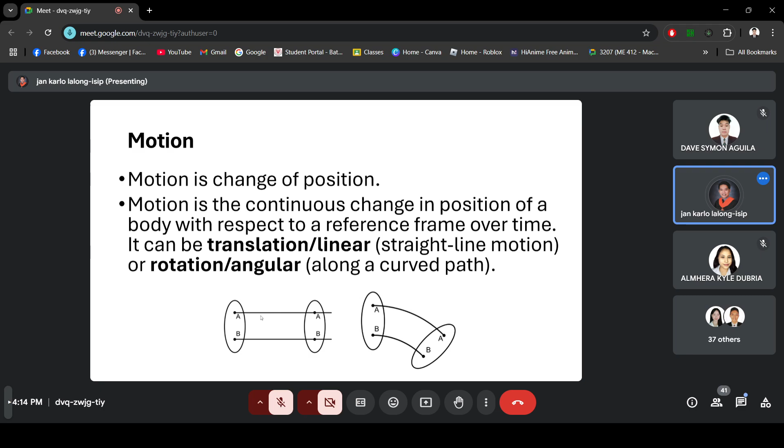So motion, ilang beses na natin na-define, motion is a change of position. So motion is a continuous change in position of a body with respect to the reference frame over time. So sabi nga natin, it can be translation or rotation or angular. So path, a point moving in space describes a line called its path.

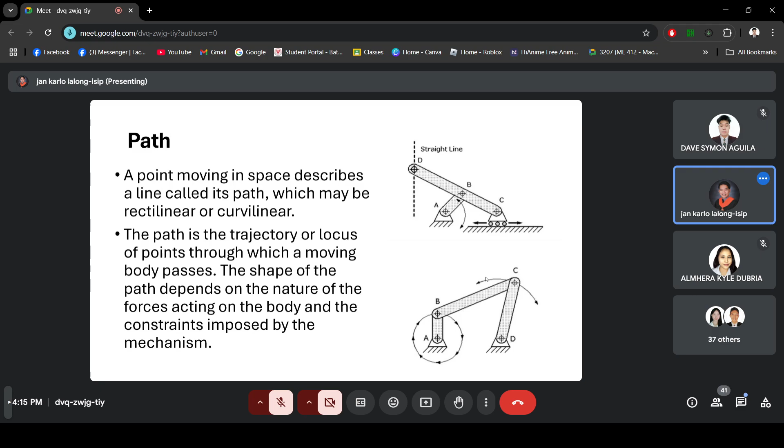While yung ating point C naman, ang kanyang path ay left and right, ganito. Another definition, we have the direction. So direction naman, it refers to the orientation of movement along the path. Tulad nito, ang direction niya is up and down. Ito, left and right. Ito naman, ang kanyang direction ay clockwise. Ito naman, it is back and forth. So pabalik-balik siya, going to the left and going to the right.

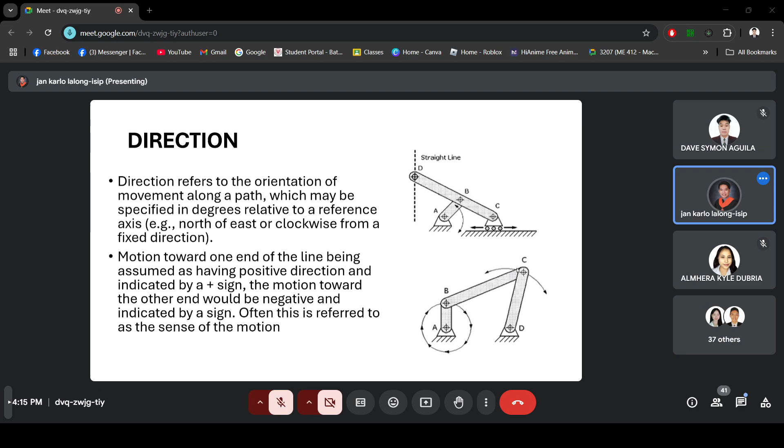So, yun lang naman yung mga basic terminology na ginagamit natin when it comes to the study of motion. Okay, now, so we have minimum and maximum transmission angle. So, we have already discussed yung pag-identify natin, paano ba natin minemeasure yung length at saka yung mga angles ng isang mechanism. So, for this example, we have the 4-bar linkage.

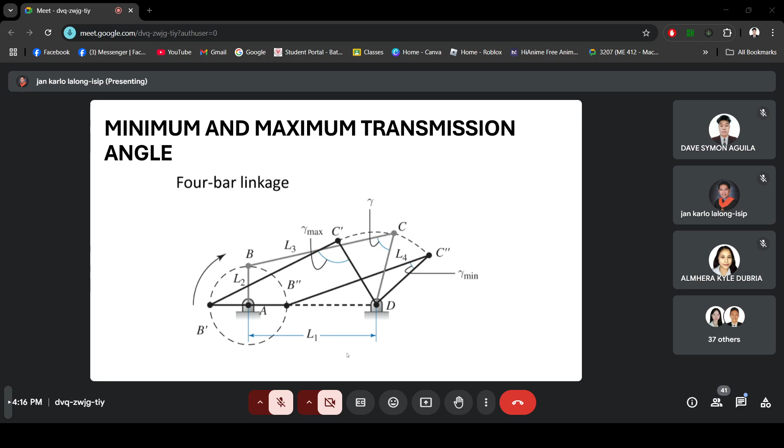Okay, so wait lang, lilipat lang ako. Okay, wait lang natin mag-respond.

Bale, last meeting, tama ba? We have discussed yung ating vector analysis. So, we studied kung paano ba natin aalamin the angles at saka yung ating mga sizes ng length ng ating mga links. Okay, so for our 4-bar linkage example, how are we going to identify kung kailan nag-occur yung kanyang minimum or yung kanyang maximum transmission angle? Okay, so if we take an example nga ng ating 4-bar linkage.

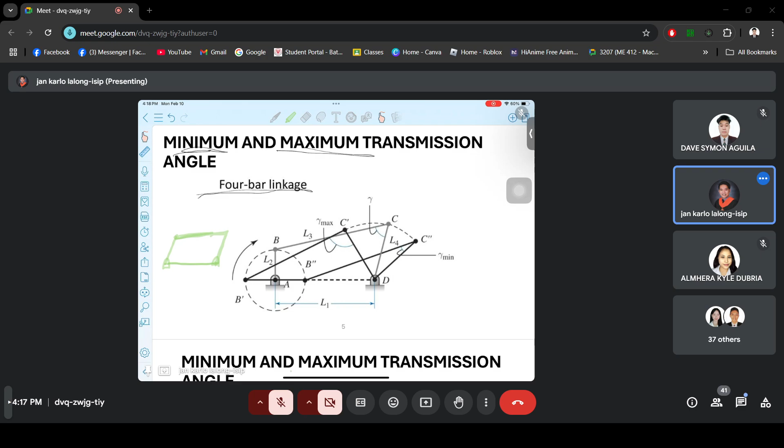Okay, so we have the fixed link. Tapos, yung ating input link, our connecting link, at saka yung ating output link. Tapos, kailan ba natin masasabi na angle is at maximum? So, angle is at maximum kapag yung ating input link ay naging collinear sa ating fixed link. So, parang ganito. If you have this fixed link, this will be our input link. Tapos, we have our connecting link at saka yung ating output link.

Okay, so nasan ba yung ating transmission angle? So, anybody? Do you remember sa ating last discussion? Saan located ang ating transmission angle? Class? Hindi na ba tanda? Sa upper right po. Upper right? Okay. Again, I will discuss it.

Diba we have our input link, our fixed link, ito, our connecting link, at saka yung ating output link. Our input angle ay yung between sa ating fixed link at saka sa ating input link. So, ito yung ating input angle. While yung ating transmission angle is located between our connecting link at saka ang ating output link.

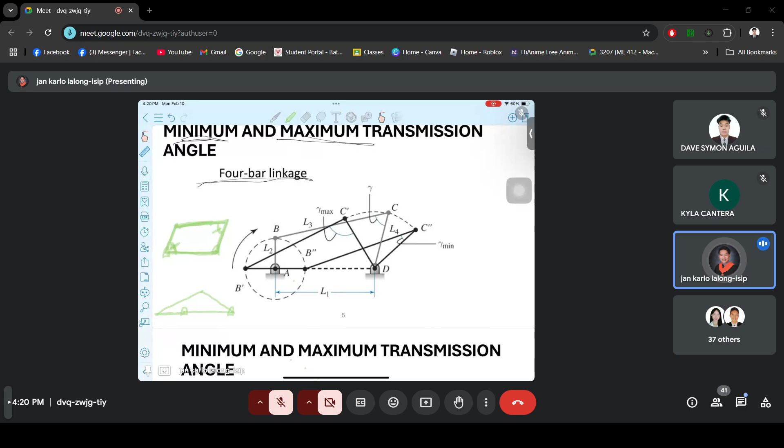So, another question, naalala ba kung nasaan ang ating output angle? Sa lower right po. Ano yun? So, ang ating output angle ay located dito sa ating labas ng link. So, this is our output angle. Ito yung ating transmission angle. At ito naman yung ating input angle. So, make sure na alam nyo yung ating mga terms na yan.

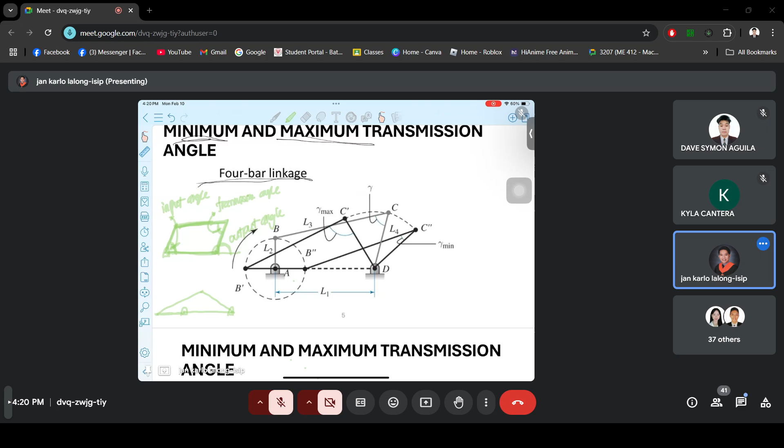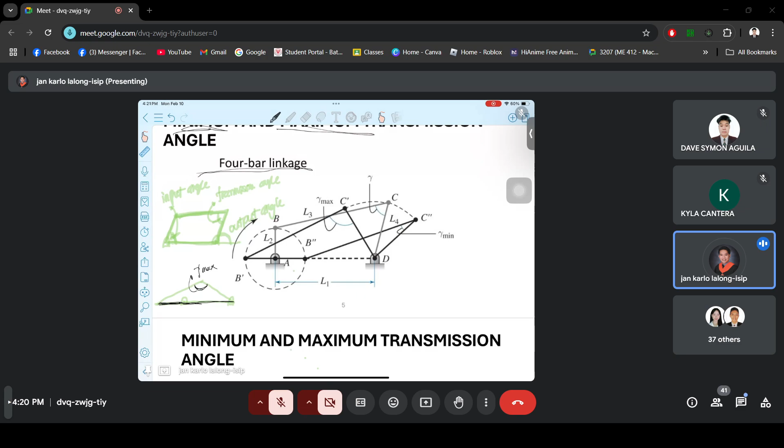Okay, so kapag daw yung ating input link ay collinear na sa ating fixed link, our transmission angle is at maximum. So at this point, our transmission angle is at maximum. Okay, so now, paano naman natin ma-identify if the angle is at minimum value? We can say na nasa minimum value siya if yung ating input link naman ay naging collinear din sa ating fixed link, pero hindi lang siya naging collinear, pumatong siya sa ating fixed link.

Okay, so let's have the figure. If you have this fixed link, ngayon, our input link ay pumatong dito sa ating fixed link. Tapos, we have our connecting rod or connecting link saka yung ating output link. So, at that point ng ating 4-bar linkage, this angle will be our minimum transmission angle. Okay, so are we now clear? Kapag 4-bar linkage, alam na kung kailan nagiging maximum at kung kailan nagiging minimum yung ating transmission angle.

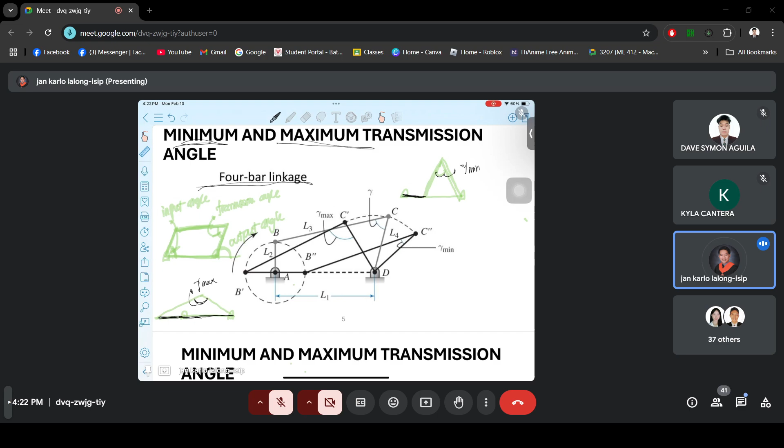Okay, so let's proceed. Paano naman kapag we have a slider crank mechanism? Kung makikita nyo, nandito yung ating ground, pero meron din tayong fixed ground dito. So paano ba natin i-measure yung ating transmission angle? So with that, we have our slider crank mechanism. We are going to get yung perpendicular line dito sa ating slider. Tapos, this angle will be our transmission angle.

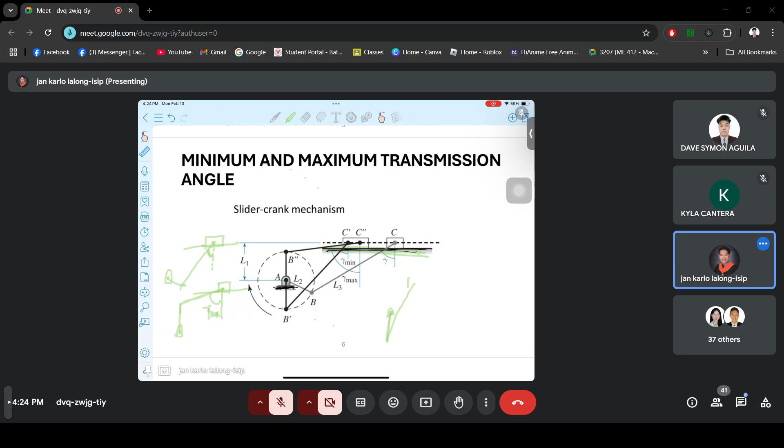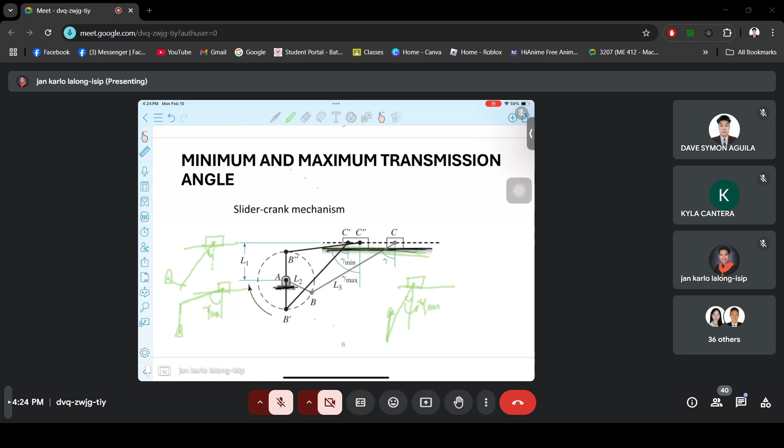Okay, sige. Proceed tayo sa sunod. Let's focus more on this sample problem. Okay, so last time we have solved yung ating 4-bar linkage, no? We get yung ating mga angle, yung ating transmission angle. So for now, for this example problem, I just want to assess din. Wait lang.

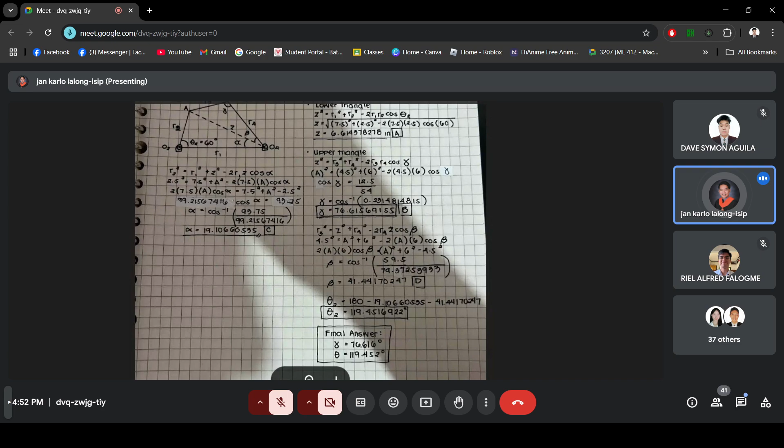Okay, so thank you. Pareho ba kayo na nakuha dito? How about the others? You have the transmission angle of 76.62. So sa final answer, let's just round off sa dalawang decimal points, ha? Tapos we have the output angle na 119.45. Okay, so very good for that.

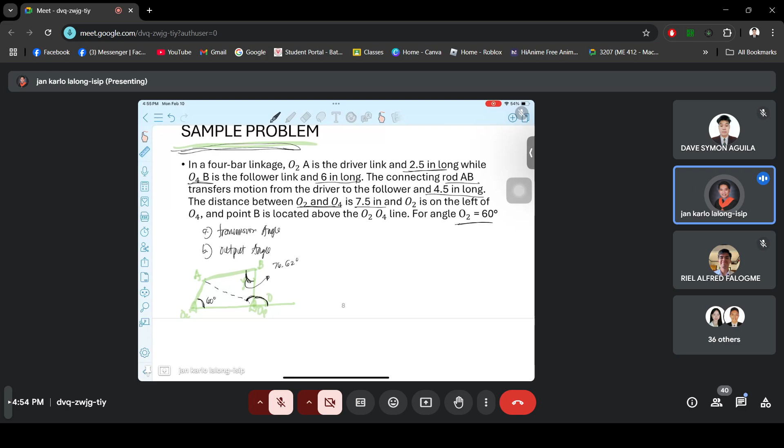So if you sine law, so we have sine O sub 4 over yung katapat ng side. So ang side na ito ay, ang measurement niya ay 4.5, tama? So this is 2.5, this is 7.5. Tapos ito ay 6 inch. Okay, so 4.5 is equals to sine B, which is 76.62 degrees over yung value ng ating AO sub 4.

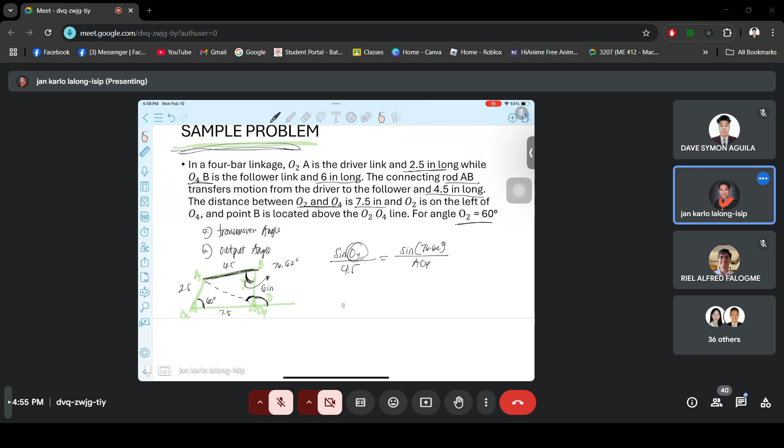Makukuha na natin itong O sub 4 dito. Okay, so kanina ang pinresent is gumamit ng cosine law. So sabi ko nga, any naman ang gagamitin nyo. Okay, so very good. Nakuha naman. We have 76.62 tapos yung ating output angle na 119.45. 119.45 degrees. Okay, so sabi ko nga sa inyo, this illustration

ay para lang sa ating visualization. Para lang ma-visualize natin ano ba yung itsura ng ating 4-bar linkage. Pero if we use it graphically, mas magiging accurate yung ating drawing.

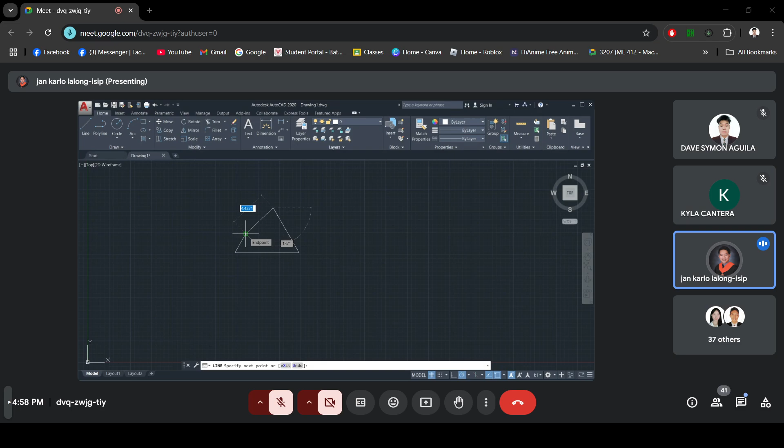Tapos this is 6 inch long. Kung makikita natin, if we are going to connect itong ating dalawang point, so this is 4.4271. So ang ating measurement nito, exactly, kapag ginamit natin ay yung ating analytical approach, so that will be 4.5. Tama. So since yung ating ginamit na angle is 120 kasi hindi naman natin ma-exact yung ating measurement ng angle dito sa ating AutoCAD. So nagkaroon lang siya ng konting differences.

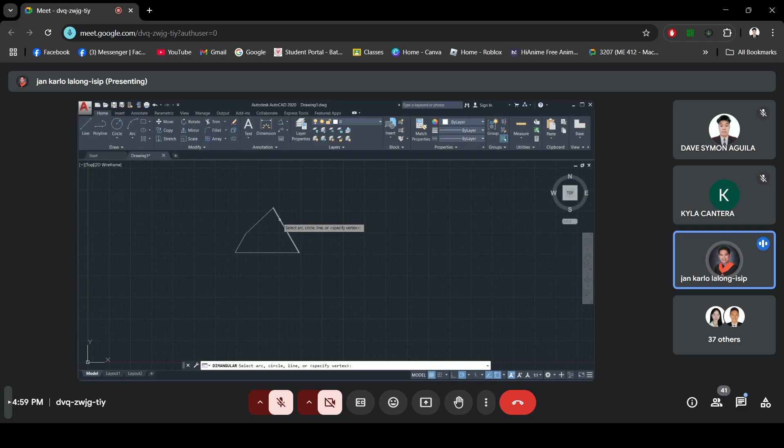Okay, so if we measure yung ating angle dito, so this is 77 degrees. Okay, so kanina nung kinuha natin using our analytical approach, so yung ating transmission angle is 76.62. If we use itong graph, so na-measure natin na meron siyang 77 degrees, which is really close sa ating exact value. So in graphical approach, this is acceptable.

Okay, so are we clear sa pag-graph or pag-drawing ng ating 4-bar linkage using the situation sa ating problem?

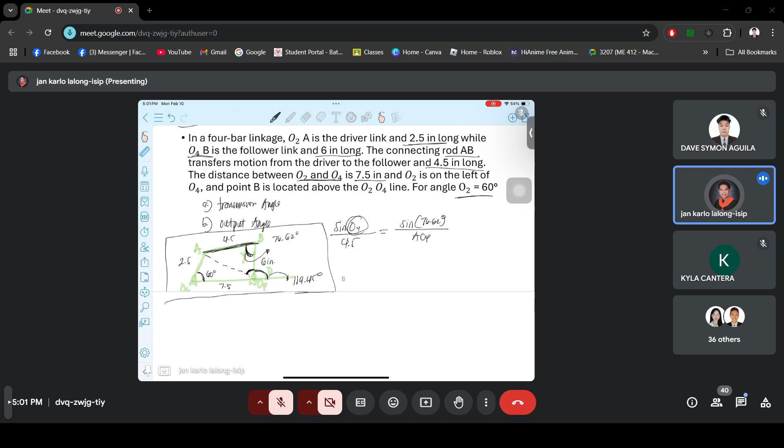Okay, so let's proceed. Paano naman if we are going to get, paano natin ma-identify yung ating maximum, yung ating 4-bar linkage at maximum transmission angle and at minimum transmission angle. So kanina, we have identified kung paano ba natin masasabi na ang ating given ay at maximum or minimum transmission angle. Okay, so we can say na we have, wait lang, excuse me lang.

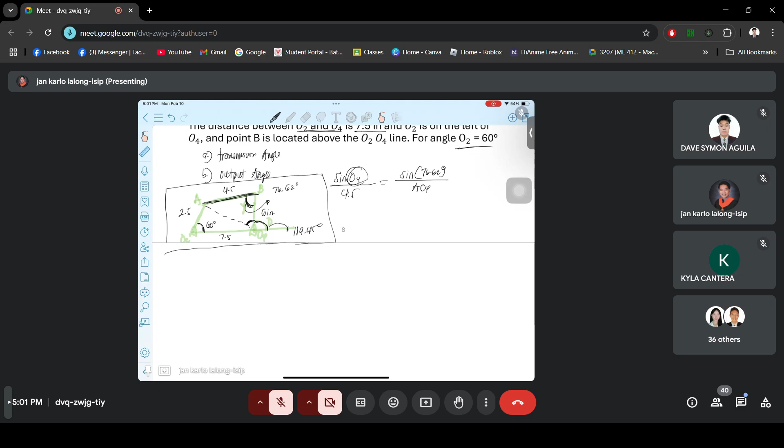We have the maximum transmission angle when our input link is linear to our fixed link. If we have this fixed link, which is 7.5 inches, it's maximum when our input link, which is 2.5 inches, is positioned here. Then we have our connecting link, which is 4.5 inches, and our output link which is 6 inches. Now we are going to get this transmission angle.

So that will be our maximum transmission angle. Do you have any idea how we are going to get our transmission angle? What are we going to use?

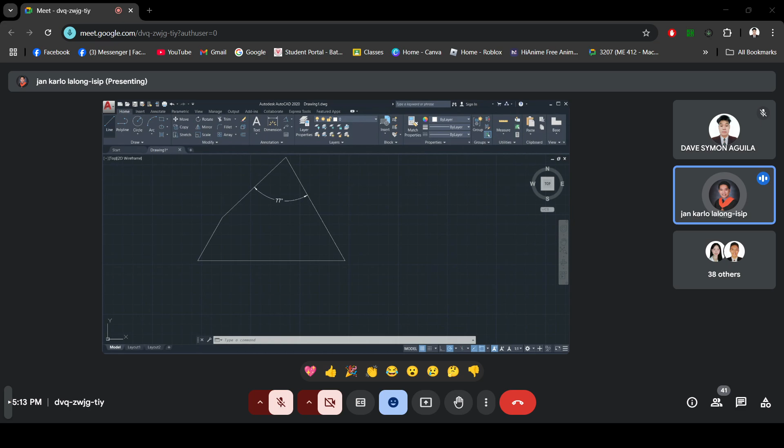Okay, so let's try again sa ating AutoCAD on how are we going to present it on a graphical way. Okay. So dito, we have our fixed link at 7.5. Wait lang. So hindi pala siya kasha. So we have 7.5 na fixed link. So this link will be 7.5. Tapos yung ating input link na 2.5 ay inline sa ating fixed link. So we have this link. Tapos we have our output link na may output angle na 15.29.

So let's just say na okay. So hindi pala natin na minus. Let's go back muna dito sa ating solution. Medyo nagmadali. Okay, so this is still our angle O sub 4. Ito yung angle na yon. Ito yung ating 15.29. So to get yung ating angle na to, we have 180 minus 15.29 degrees. Paki-minus, what will be the answer? 164.70 po. So we have 164.70 degrees. So this is our output angle.

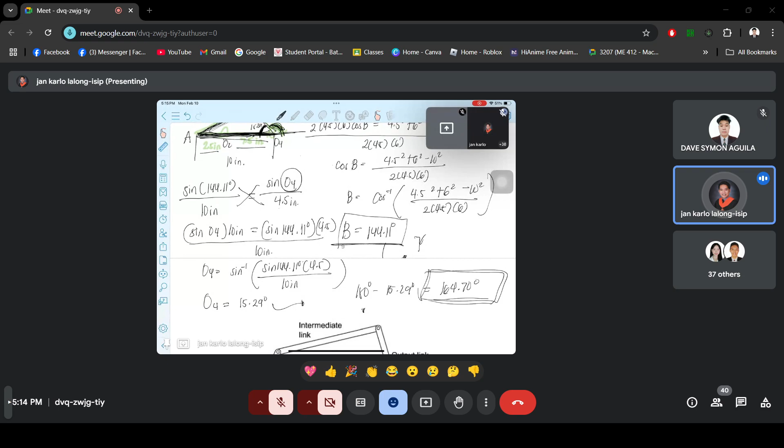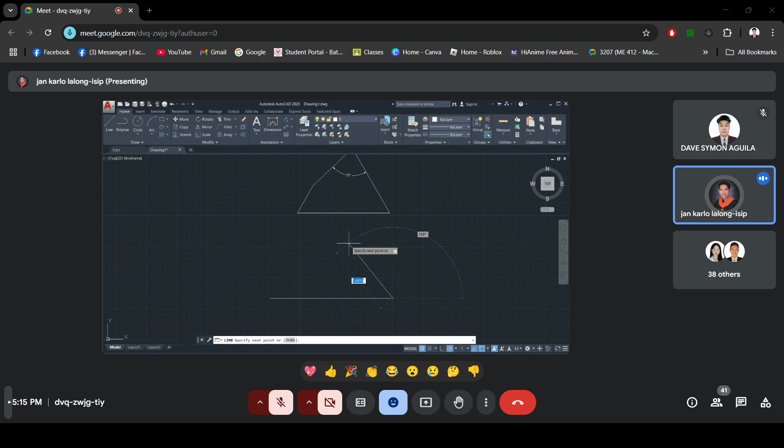So going back sa ating graphical approach. So let's go back here. Ulitin na natin. Diba, meron tayong fixed link na 7.5 dito. Tapos, yung input link natin ay nakaline sa ating fixed link, which is 2.5 ang kanyang length. Tapos, we have our output link dito. Tapos, meron siyang angle na 164.70. So, let's just say 165 degrees. Yan. Tapos, siya ay 6 inch long.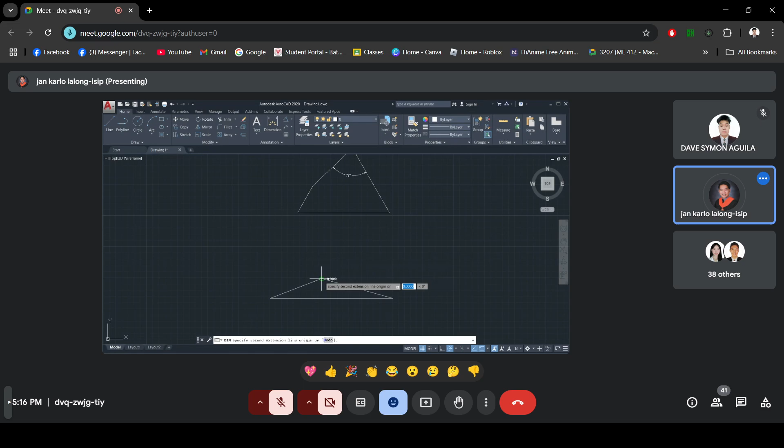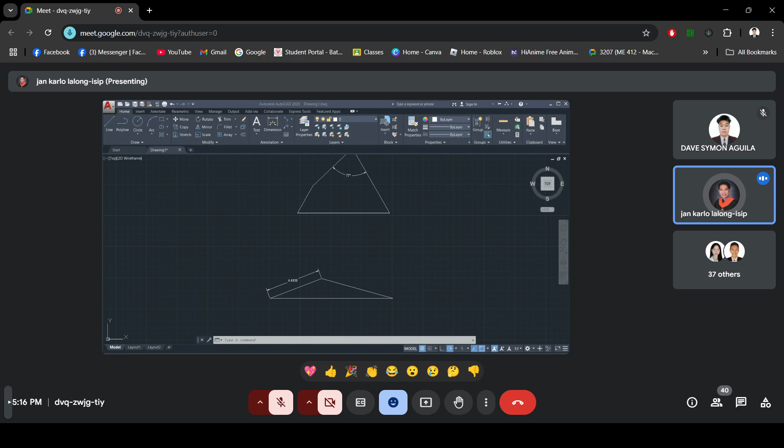At connecting sa ating input link, yung ating connecting link. So, kung makikita natin, okay. Mali. Hindi pala dapat linear. Align. So we have 4.49. So kung makikita natin, our value ng ating connecting link ay 4.5. So almost equal na sila.

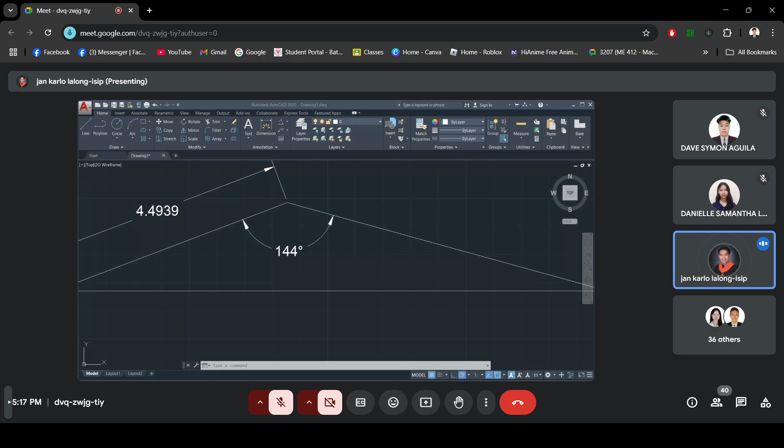Tapos, if we get yung ating angle dito, we have 144 degrees. So, yung ating na-compute, we have 144.11. So, makikita naman natin, yung nakuha natin in analytical computations at sa ating graph sa AutoCAD, almost the same. Mas exact lang yung ating nasa analytical approach. Okay, so alam na kapag we have our maximum transmission angle. Okay, so let's proceed sa next.

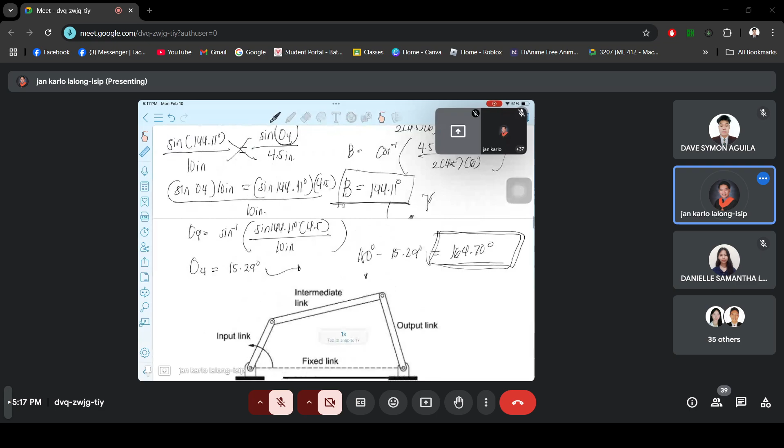We have to identify naman yung ating minimum transmission angle. If we have our minimum transmission angle nga, sabi natin, naging collinear din yung ating fixed link at input link, pero yung ating input link ay pumatong sa ating fixed link. So if we have our 4-bar linkage dito, we have our fixed link. Tapos, ito yung ating magiging input link na nakapatong. Tapos, we have our connecting link at saka yung ating output link. So, this will be our minimum transmission angle.

So, ngayon, this is 7.5 inches, itong kabuuang ito. Tapos, this is 2.5 inches. Ito ay 4.5 inches at ito ay 6 inches. Okay, so anyone, do you have idea paano natin kukunin itong ating minimum transmission angle? Any idea paano natin yun makukuha? Nandito ba si Catapang?

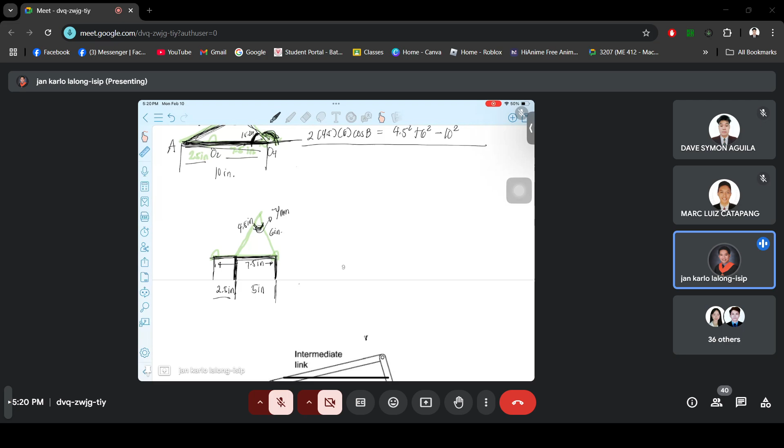Okay, so ngayon makukuha na natin yung ating transmission angle. We have the cosine law. So we are using this angle. So para ma-equate natin using cosine law, we will get yung katapat niya na side. So ang katapat ng angle na to ay 5 inches. So we have 5 squared is equals to yung ating dalawang side pa: 4.5 squared plus 6 squared minus 2 times 4.5 times 6 cosine, ito ay ating B.

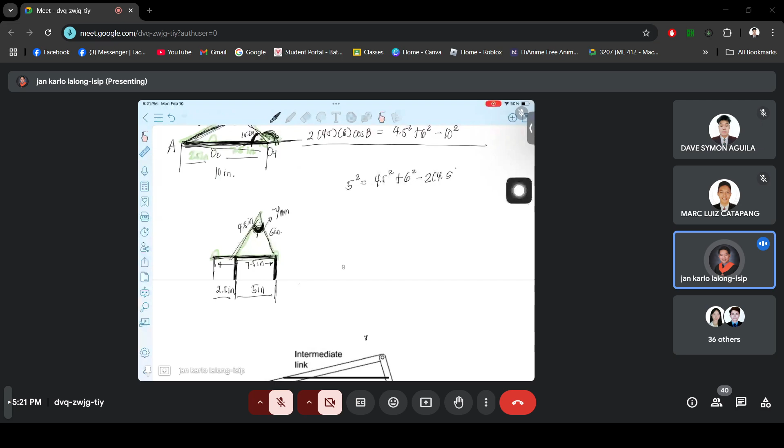We have O sub 2, O sub 4, tapos nandito yung ating point A. Cosine B. Okay, so we are going to use yung ating equation din kanina. Para makuha natin yung ating angle B, we have arc cosine of 4.5 squared plus 6 squared minus 5 squared over 2 times 4.5 times 6. So again, this is same lang naman dito. You can use naman shift solve. It's up to you. Basta makita ko itong mga values na yan.

So what will be the value of our transmission angle? Pakicalculate, ano ang lalabas sa ating transmission angle? 54.64 degrees po. We have 54.64 degrees. So how about the others? Same ba na nakuha kay Jenny? Same po. Same naman. Okay.

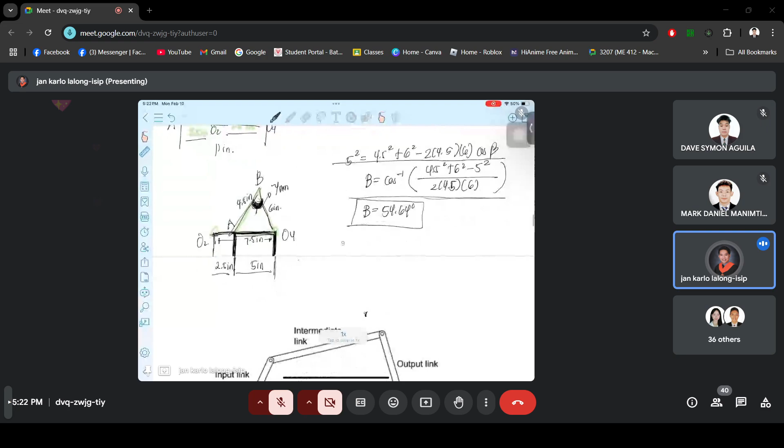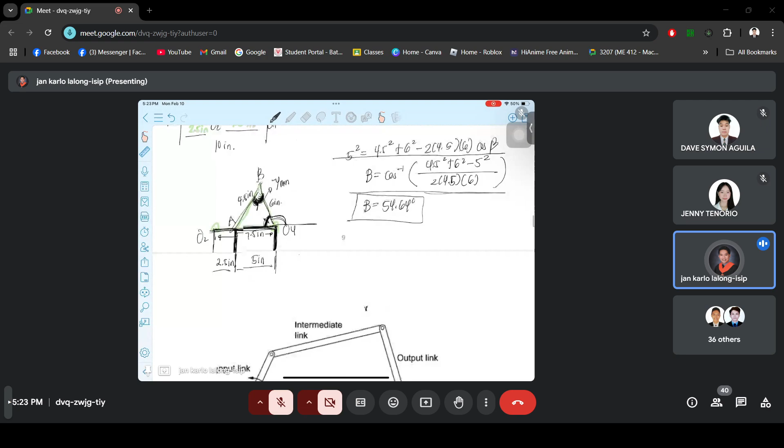Next, we are going to get yung ating output angle. So, paano natin siya kukunin? Kunin muna natin tong angle na ito. Wait lang, naglalag. Okay, so we are going to get muna itong ating angle dito. So, anong gagamitin natin ulit para makuha itong angle na to? Sine law po. Okay, we are going to use our sine law. Pwede rin natin gamitin yung cosine law, ano yung mas madali sa inyo. Since sine law yung ginamit kanina, sine law na din ngayon. So, we have this angle, may value na tayo.

So, we have sine 54.64 degrees over yung katapat niyang side ay 5 is equals to sine of yung ating missing angle which is O sub 4 over yung katapat niyang side. So, ang katapat niyang side ay 4.5. Sige, pakicalculate what will be our value of angle O sub 4. We have 47 point, ano yan? 22 po. 22, tama? Okay, how about the others? Ito din ba nakuha?

Okay, now, kapag kukunin natin itong ating output angle, we have 180 minus 47.22 degrees. So what will be the value of our output angle? 132.77 or 78? 132.78. 132.78 degrees. So how about the others? Same ba na nakuha? Same lang po. Okay. So again, we have this value for our minimum transmission angle condition.

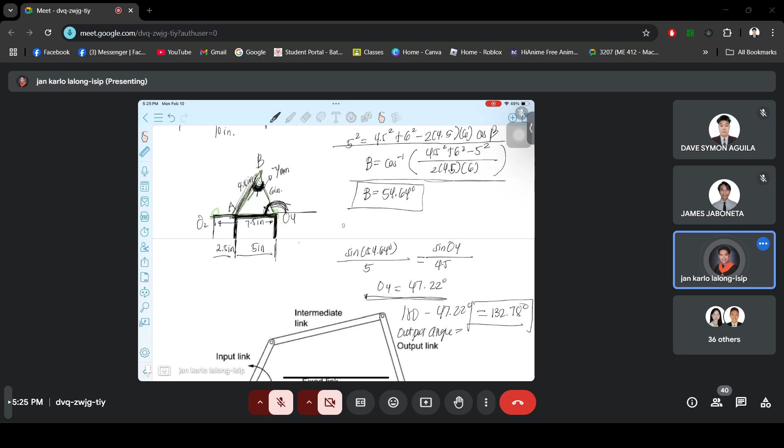So balik tayo sa ating AutoCAD. So again, we have our fixed link na 7.5. Tapos yung ating input link ay nakapatong sa ating fixed link which measures 2.5. Tapos yung ating output angle, drawing natin dito, output angle na 132.78, so let's say 133. Tapos siya daw ay 6-inch long. Tapos i-connect natin sa ating input link.

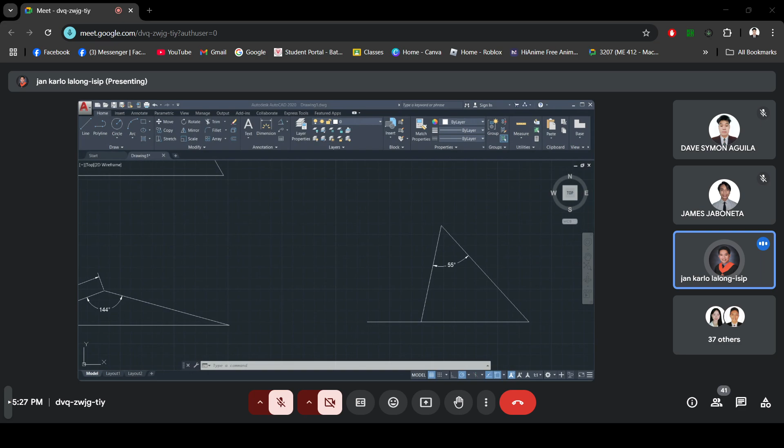Okay, so if we measure again our minimum transmission angle, the value is 55 degrees. Using our computation, ang nakuha natin kanina ay 54.64. So that is almost the same. Sa graphical, hindi eksaktong-eksakto yung ating nakukuhang angle, kasi hindi naman nami-measure yung angle dito ng decimal points.

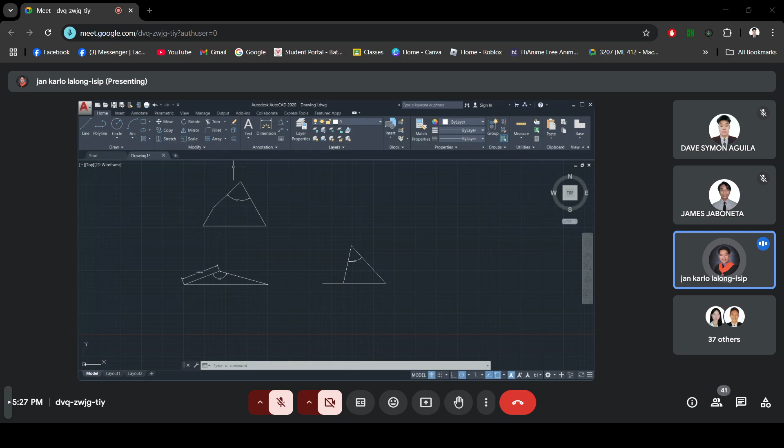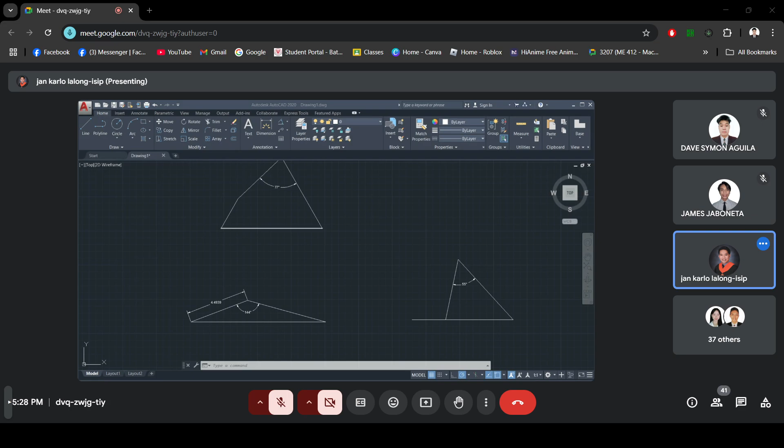Okay. So that's our totality ng ating lesson for today. So we have this condition. You are given yung ating 4-bar linkage, tapos you are going to get ano ang magiging measurement niya when we get yung ating maximum transmission angle at minimum transmission angle. So, your design plate number 1 next week will be just that easy. I will just give you given. You are going to compute and use graphical method para i-graph yung ating mga links. Ito lang muna ang ating i-discuss for today.

So, naintindihan ba? Do you have any questions? Again guys, it is very important na alam nyo yung basic when it comes to solving triangles, kasi almost dyan lang din umiikot yung ating mga calculations. We have sine law, cosine law. Kung meron tayong right triangle, we have the Pythagorean theorem, saka yung ating SOHCAHTOA.